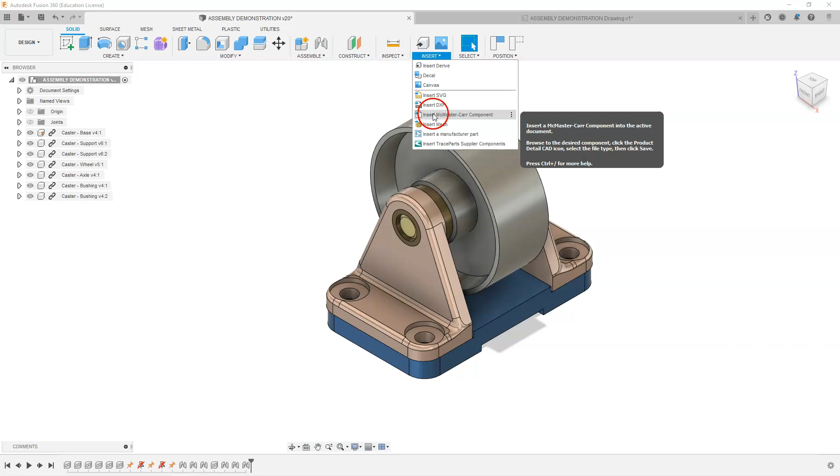So we're going to start off with our wheel assembly open in place. The first thing we're going to do is add some hardware, some socket head cap screws. We're going to go up to the insert menu, where we have some options to insert parts, and we're going to select Insert McMaster-Carr Component.

When we select that, the McMaster-Carr website is going to pop up, and we have many options. If you scroll down the left-hand side, you will see lots of hardware there. The first thing we're going to do is select screws and bolts.

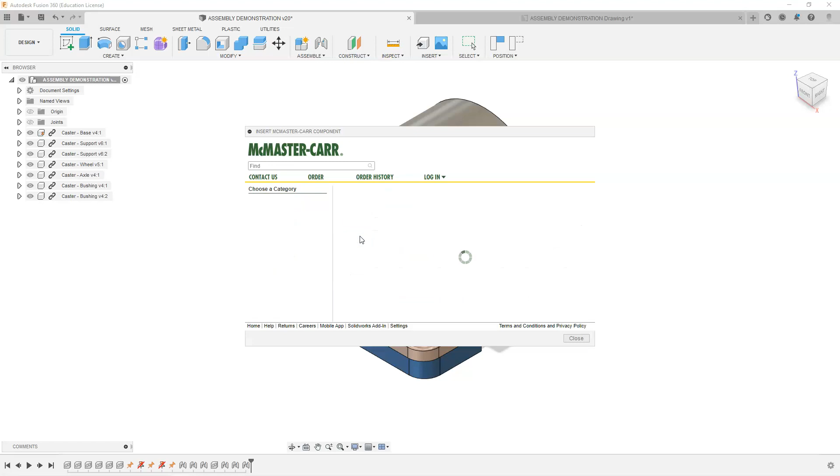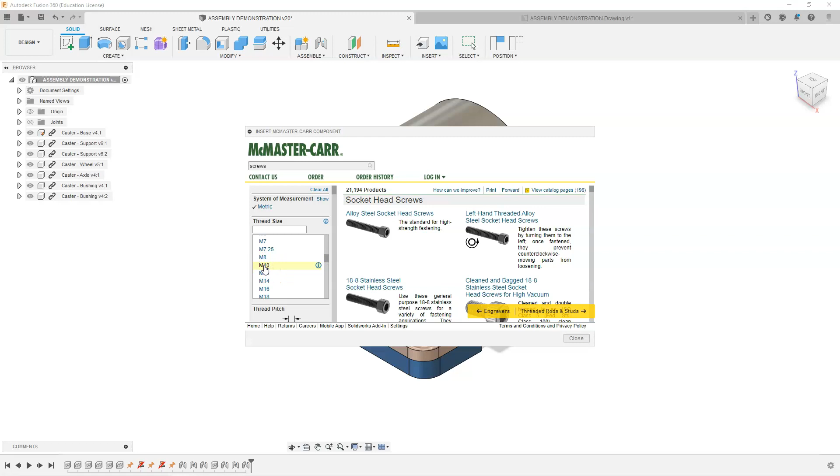We're going to start narrowing our selection down. We want a metric screw because our wheel assembly is a metric assembly. For our thread size, we're going to change it down to an M10. If we scroll through here and select our M10, that's going to narrow down some other options.

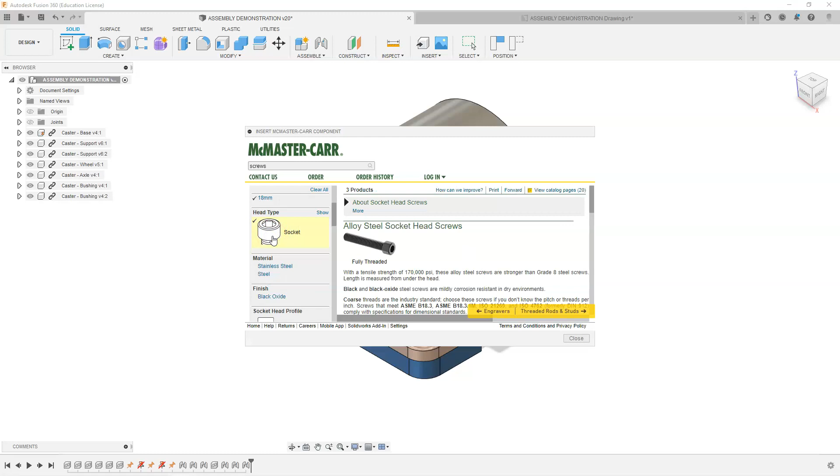So we can keep scrolling down here, and what we want is a length that's going to work for us. We're going to select an 18 millimeter, our head type is going to be socket head, and our material type we're going to select stainless steel.

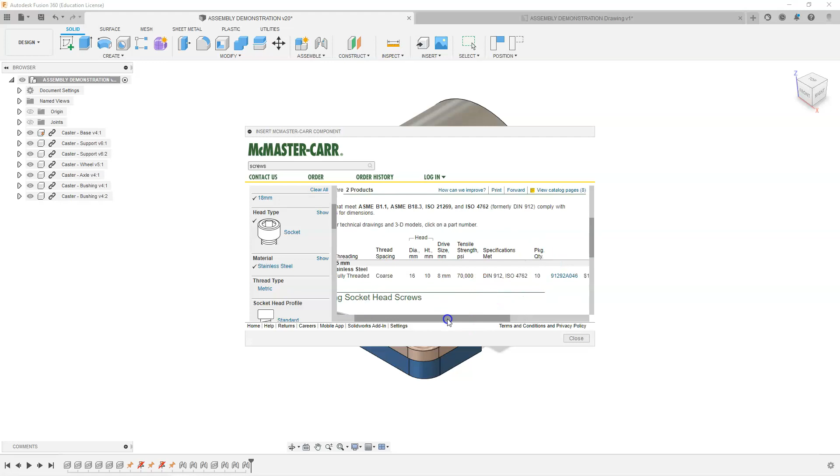That keeps narrowing our options down here, and it has given us some different options. We do have an 18/8 stainless and a sealing type socket head cap screw, but we're going to stick with this first option. If we scroll across and down a bit, we're going to select this product number here, so it's a link to that screw.

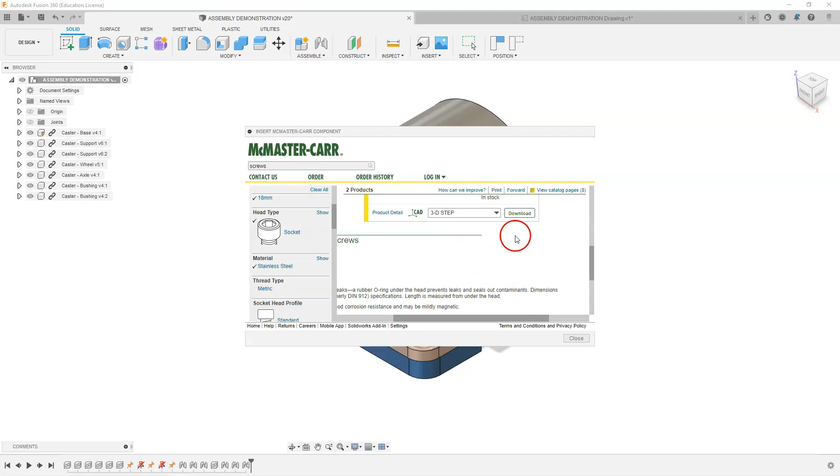What we can do is download the model. We're going to expand this and select the 3D STEP model, which is a standard type of 3D model, and then select the download button.

When we select the download button, Fusion will insert that screw into the assembly, just like we had any other assemblies. I'm going to rotate this a bit, get it in the orientation we want, and put it off to the side here. I think that is good for now, so we're going to select OK.

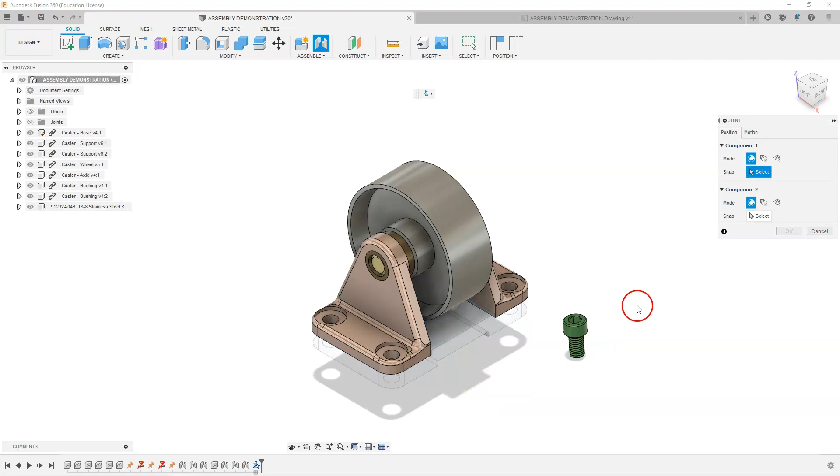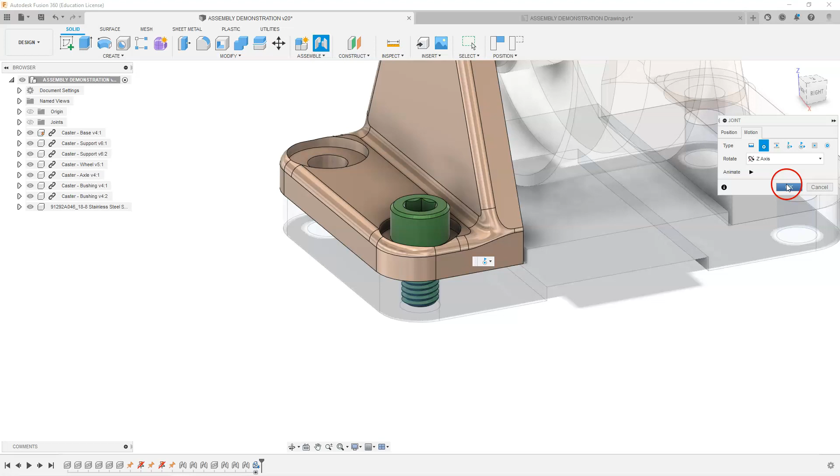So we have one screw in there, and we're going to have to put 4 in there. We're going to use our joint command, J shortcut key, and select the bottom edge here, matching it up with the bottom edge in this countersunk hole. We're going to make sure it's not rigid, so we'll use a revolute option, select OK, and go back to our default view. We can see that we have added that screw in there.

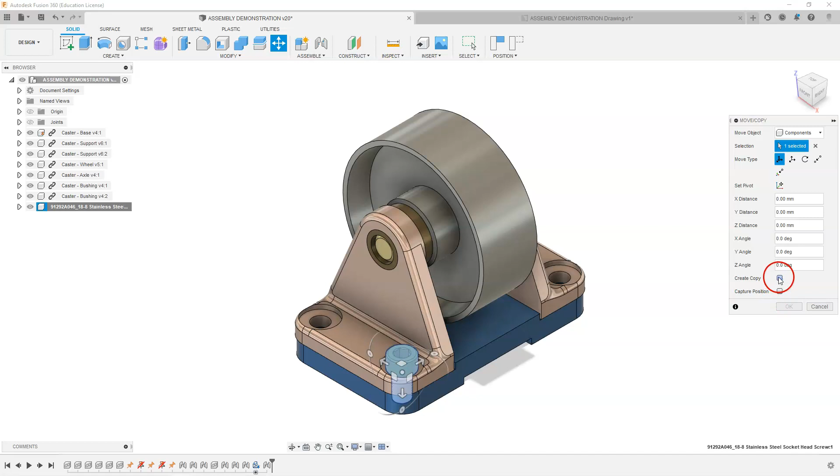Going back to our default view, I'm going to continue to add the remainder of these screws in place. I'm going to select that screw, then select move copy and make sure we select create copy, and just drag that over there and select OK. We can do the same thing again with this screw, selecting move copy again.

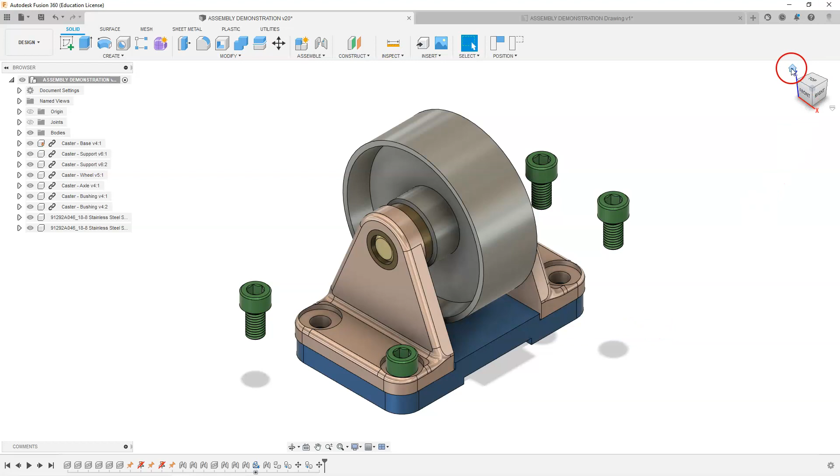Now we have all our 4 screws in there. I'm just going to constrain those all the exact same way that I constrained this first screw here. Now we have all our 4 screws in place.

The next thing we're going to do is create our exploded view. We're going to go up to our toolbar and select animation, and that's going to open up a new menu. As you can see, there are not too many options under there, so it's not as confusing or as difficult as you might think. We do have a storyboard down here.

Which we're going to control some of our motions. We can have multiple storyboards, so we could create multiple animations or explosions all in this storyboard or animation mode. We can also zoom in and out of our storyboard to get a closer look at our timeline.

So basically what we're going to do is start moving these components into an orientation or position that we would want to see in an exploded view, which is very helpful for creating installation instructions or installation videos. The first thing we want to do right now is turn this view off, so we're not going to include our different zoom levels in our explosion or animation right now. We can add that later.

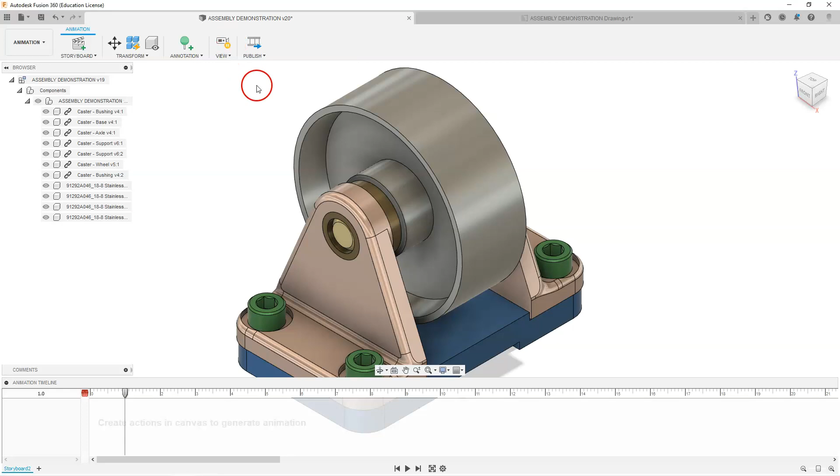So we can turn that off, so you will see the little pause button up there, and when we zoom in or zoom out, it's not going to add that to our animation.

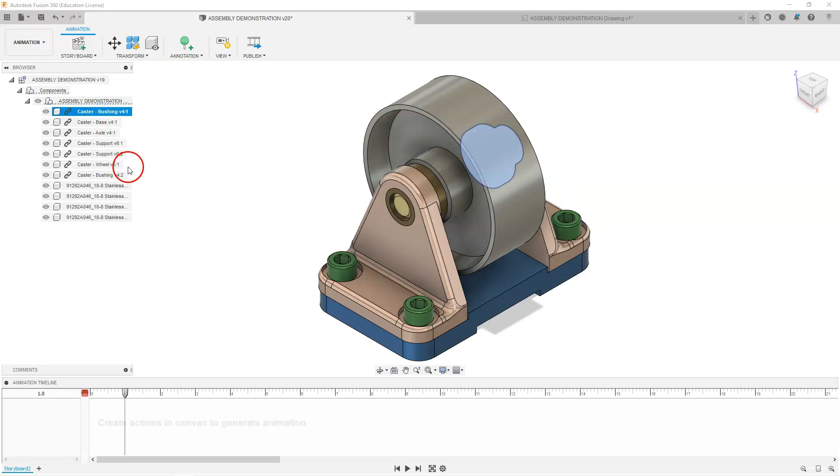So ideally what I want is I want all of these parts off of this base for starters. I want them all to be kind of in line. So what I'm going to do is hold the shift button down, or click shift, left click the first model, and shift click to select them all. And I don't want to touch my base, so I'm going to control click that, and you'll see all the other items have been highlighted.

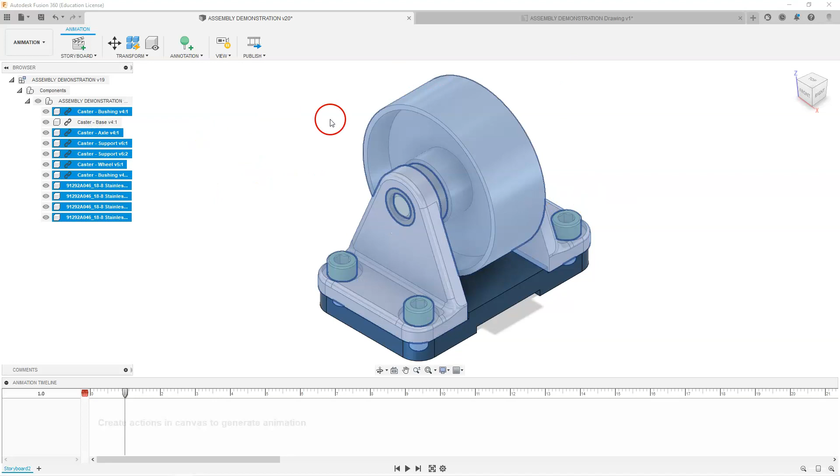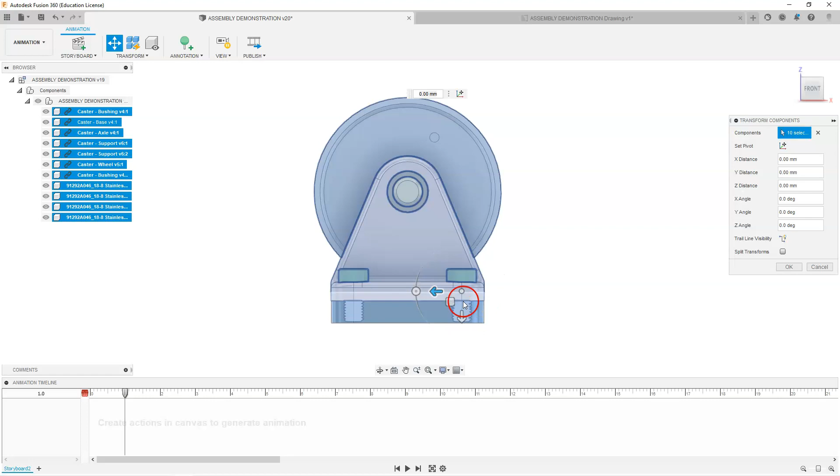Then I'm going to select my transform components, and you're going to see similar move dialogues or tools up here that you're familiar with. I want to move this straight up vertically. I may want to look at the front side of the view to see where I want that in relationship.

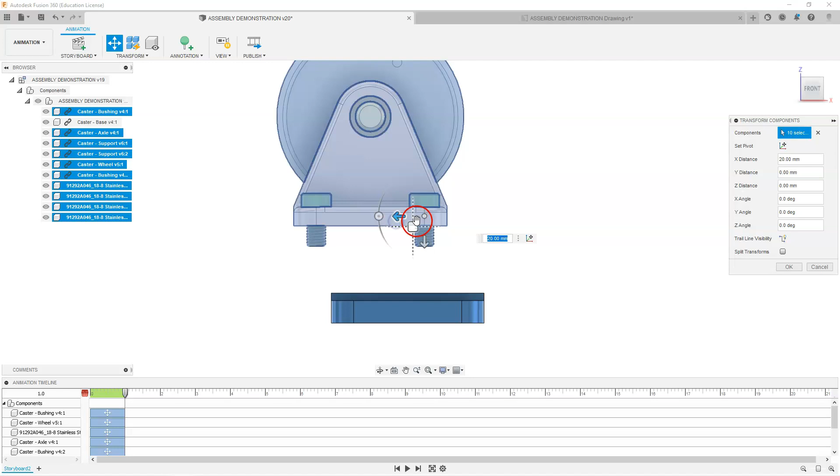So what I'm going to do is move that up to -40 millimeters, and I can control that in the dialog box, and I can add multiple moves on here. So I could go up 40 and left 20, but I'm going to keep that straight in line with the base plate for now.

Select OK, go back to my home position, and you can see that has been lifted off of the base plate. If I decided that I needed to move that or transform that further, I could right click on my object down in the timeline and select edit action, and I could make additional adjustments to that.

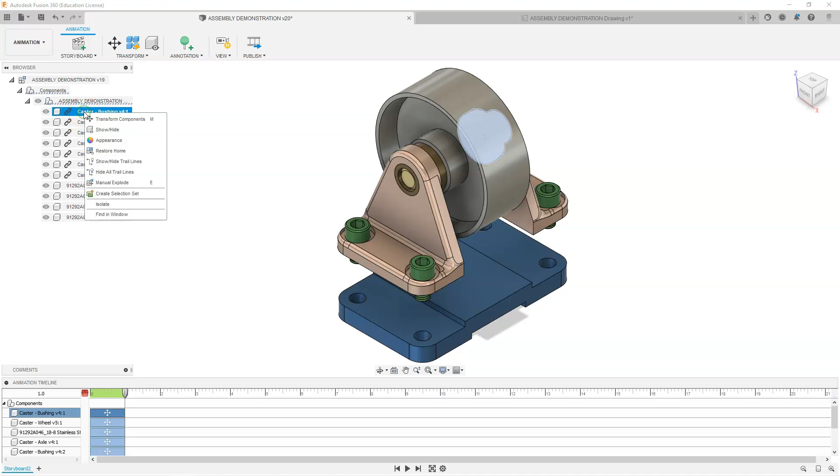The other option I have in here is trail line visibility. So what that does is add some dotted lines onto that transformation. We can also right click on there and select show hide trail lines.

We can't see the trail lines in this view right now because I'd only selected the caster bushing, which is on the far side. But we will see what those trail lines look like with further movements.

So now I'm going to make some additional adjustments to this. I'm going to move the support brackets, both of them. I will have to do those individually. So I'm going to move those horizontally out of the way, and as well I'm going to move those screws with them.

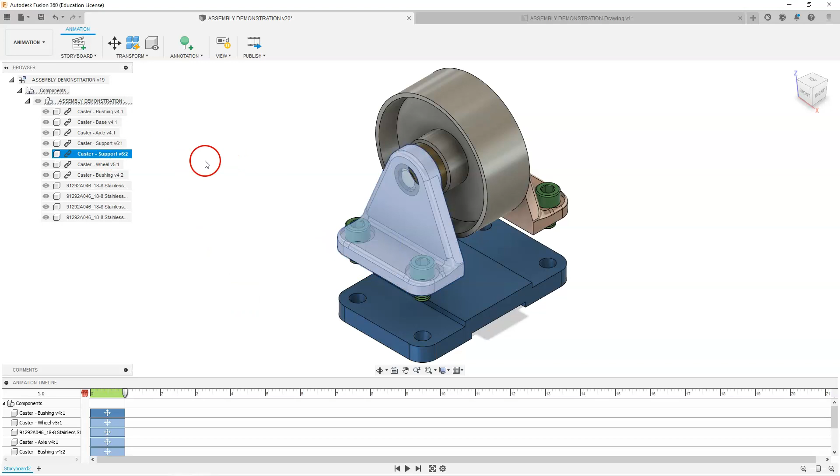So I will select my angle bracket and select transform, and I'm going to drag that out. I think 110 millimeters looks good. And if I selected the trail line visibility, you will see that trail line is showing my movement of that piece.

If I select split transform, that's going to show both movements, so it's going to show that this has been transformed up and transformed that way. I'm going to select OK. I'm satisfied with that one.

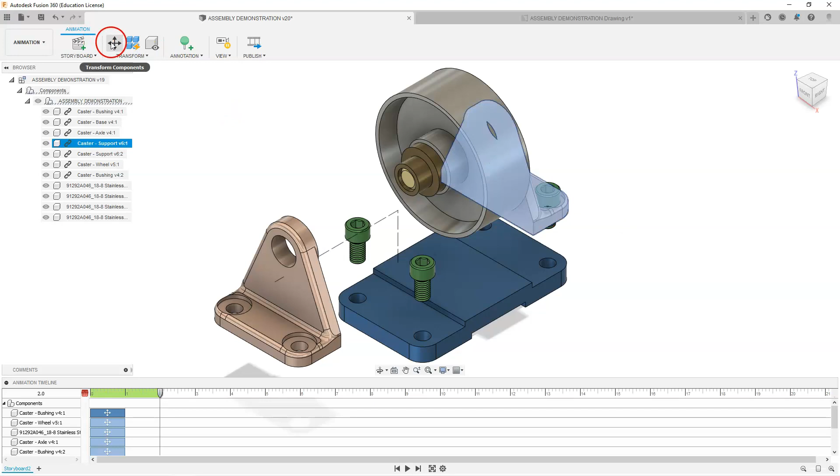Going to select my next component, which is going to be this angle bracket transform, and I'm going to move that one 100, same distance. I'll go 110 millimeters that way, and I can turn on my visibility there as well and select OK.

So you can see that my assembly is being broken apart into a more exploded view, and down in our timeline it is adding these motions down here. So that one was the last one I added, and that was the last one I added. So all of these in that first row, this is our timeline, these are all moving together from the time period of 0 to 1.

So the next transformation I'm going to do is the bushing. So I'm going to select my bushing and select my transform, and I'm going to drag that. I will drag that 50 millimeters, select OK, and I will do the other bushing, which is on the other side.

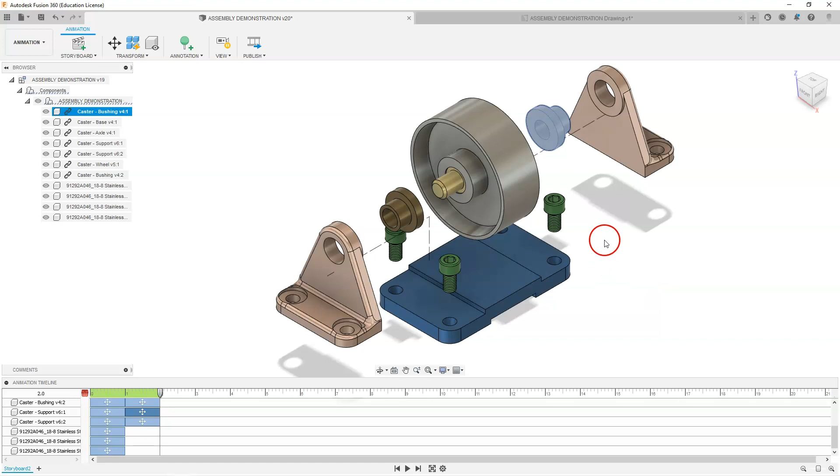And select my transform, and I'm going to move that the exact same distance, 50 millimeters that way. Select OK, and I'm going to transform my axle now. I will select the transform for that, and move that up, zoom out a bit so I can move that a little bit higher, and 100 millimeters.

That way it looks good. Now the last things that I want to transform are my screws. So if I want to see what this is going to look like in an animation now, I can select play, but we can make some of those modifications afterwards.

So what I'm going to do is select those 4 screws, and I'm going to do each one individually as opposed to selecting all 4. It might make it look a little more realistic when it comes to an animation, but we have to remember this is a view we're going to see in our exploded view drawing, so we want to make sure we capture everything.

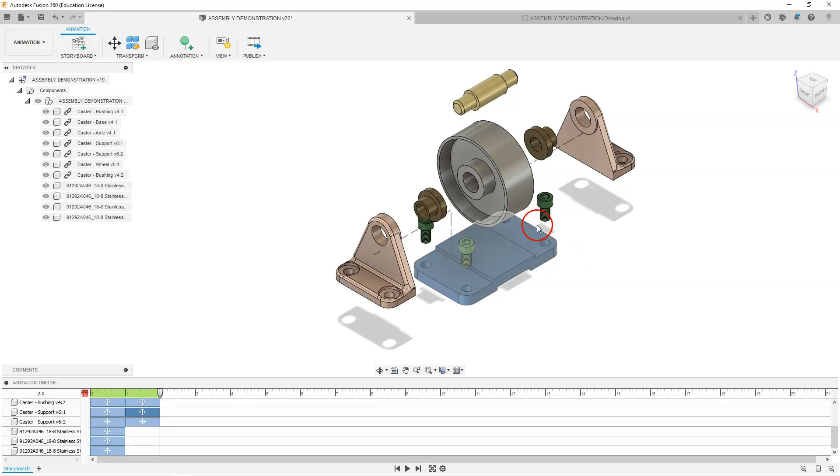So of concern right now is probably going to be my back bolt there, which I can't see. So I'm going to move that one first and see what that translation distance is so it's going to be visible. Selecting my corner bolt, select my transform, and I'm going to drag that up to there, and that was 90. Select OK, transform that. That is going to be 90. I'll do all 4 of those bolts, keeping the same distance.

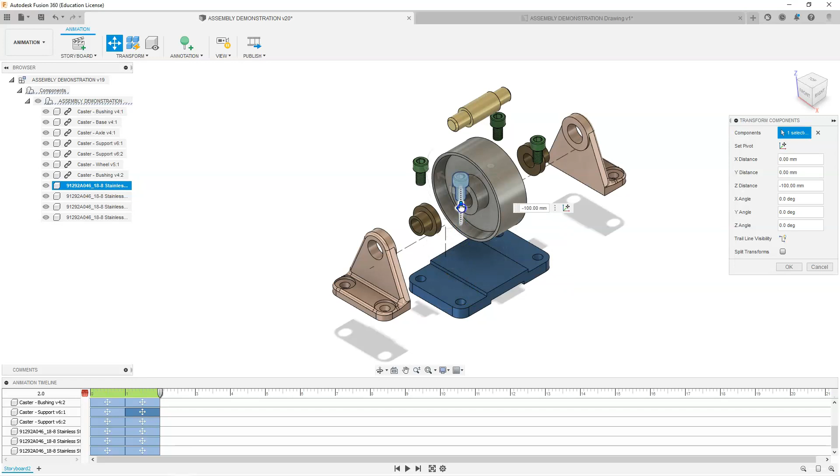So it is getting a little bit crowded in here. I might want to move my plate down, or I might want to move this one up a bit. So I'm going to go in and edit this transformation and shift that one just a little bit higher. I don't want to select that and drag that up, that's going to add an additional transformation. What I want to do is go edit that transformation.

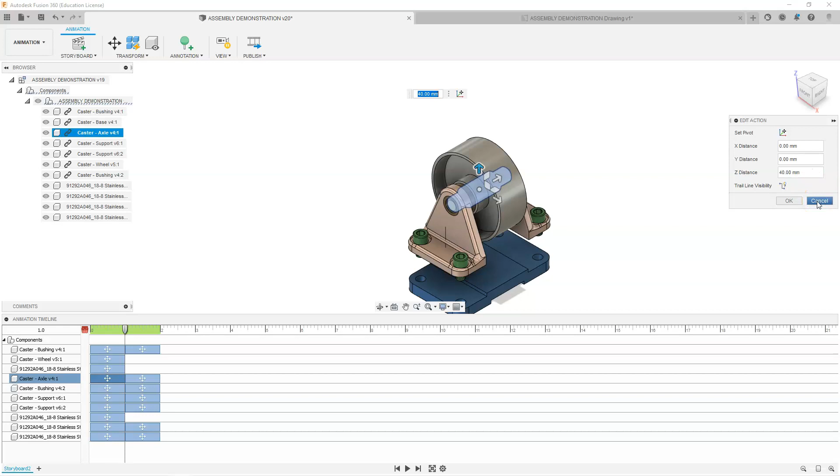So I'm going to select my cancel so that I'm not in my transform components anymore, and I'm going to look for my caster axle in my timeline, and I can drag this up a bit. Caster axle in my timeline, and it is this one that I want to edit there. So I want to edit this transformation here. I'm going to right click on that, select edit action, and drag that up just a bit so I can see all that information in there.

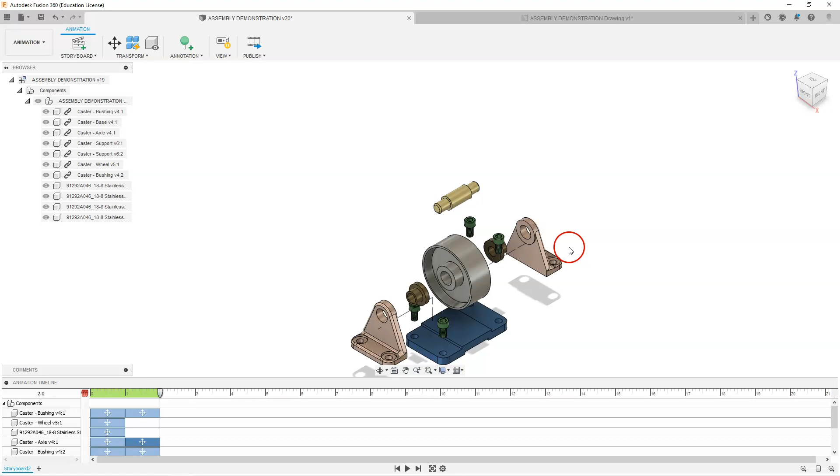Now back to my home, I'll drag this back down, and I'm going to look at the front view just to make sure I've got those screws. So I did not move some of those screws up, so I'm going to have to adjust these screws. Not sure what happened to those screws.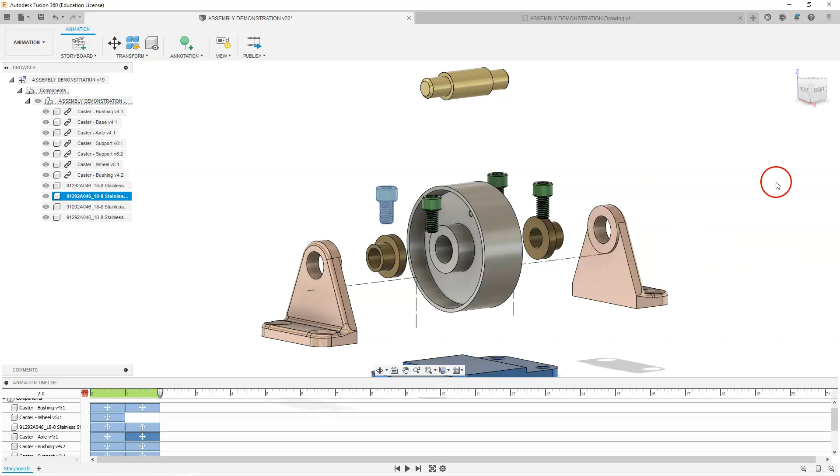They were up 90, 90, and verify that those are all in line. So I can see the front view or right side view of my exploded component there. And if I was to create my assembly, this looks fairly good. I may want to bring these screws, do some additional transformations to bring them out in the X plane. And what we're going to do is use this image to create an exploded view drawing.

So now we have to go open up our previously created assembly or wheel drawing that we've already created, and I'm not going to create a brand new drawing in this drawing here. I'm going to add a second sheet. So it has been updated. You can see this description here has been updated, so we're probably going to want to go back and take some of that information out of there. We should maintain that down to one line. But for now, we see sheet 1 of 1.

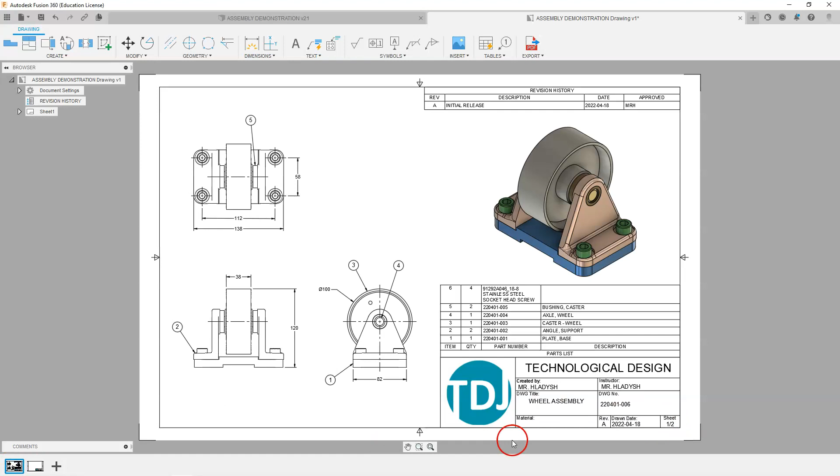But if I go down to the bottom here and select Quick Add, that is going to add an additional sheet. So that has been updated to sheet 2 of 2. And if we go back to the first sheet, we will see that says sheet 1 of 2. So working on sheet 2 of 2, we are going to add our base view in here. So we're going to select base view, and in the drawing view dialog box, instead of selecting our model representation, we're going to select our storyboard representation that we have.

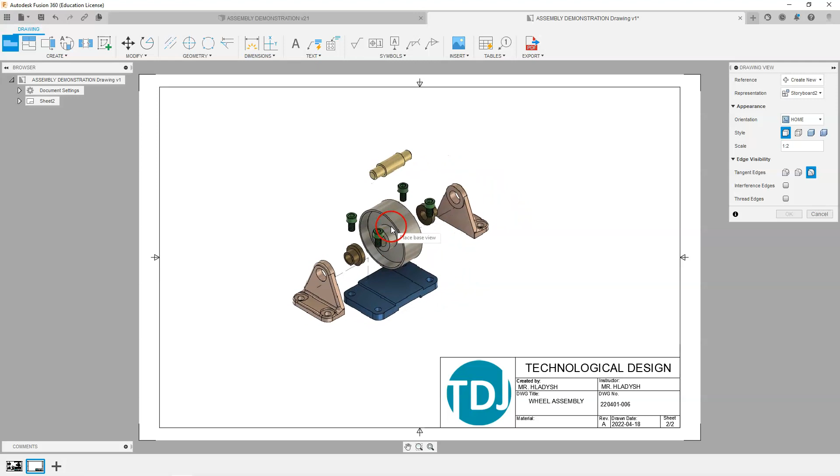So when I drag that in, that looks like a pretty good scale. I'm going to change that to a 3/4 scale. Looks like we have a little bit of room in there, might be able to make that a little bit bigger. Everything else looks fine. We can keep that as a non-shaded view, or we could change that to a shaded view. Typically for assembly drawings, maybe if it was a marketing drawing, you may want to keep that as a shaded view.

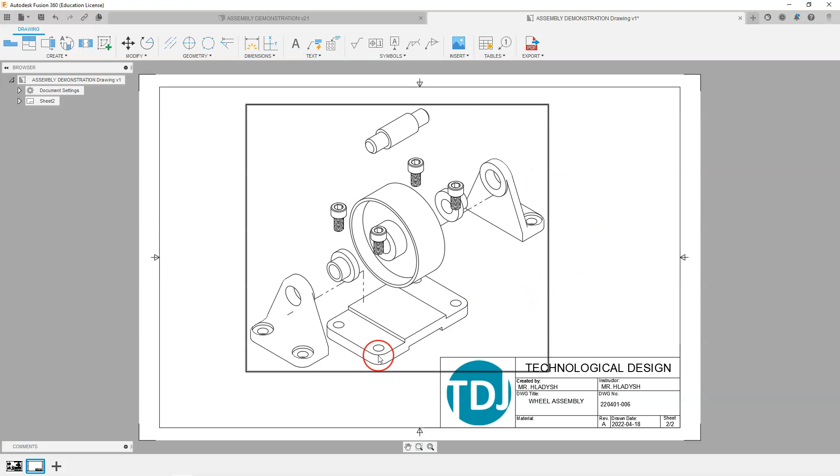And so now we have our assembly drawing that is in an exploded view. So I'm just going to save that now before I go any further.

We can't add all our balloons onto this yet, but we would have to add our table onto this. So we're going to select table, and automatic parts list would probably work.

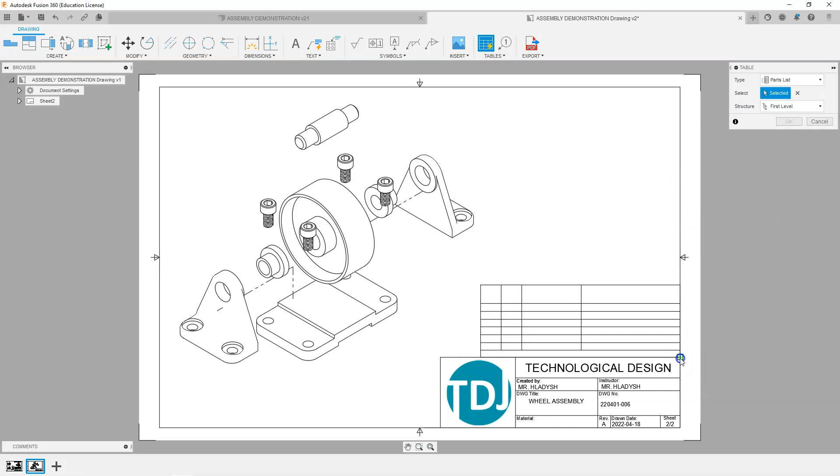Let's make some adjustments on here for the size of this table. I'm going to select that table, move it over here. Hope that didn't drag the column. Just want to move that whole table close to there, and we're going to drag that description out.

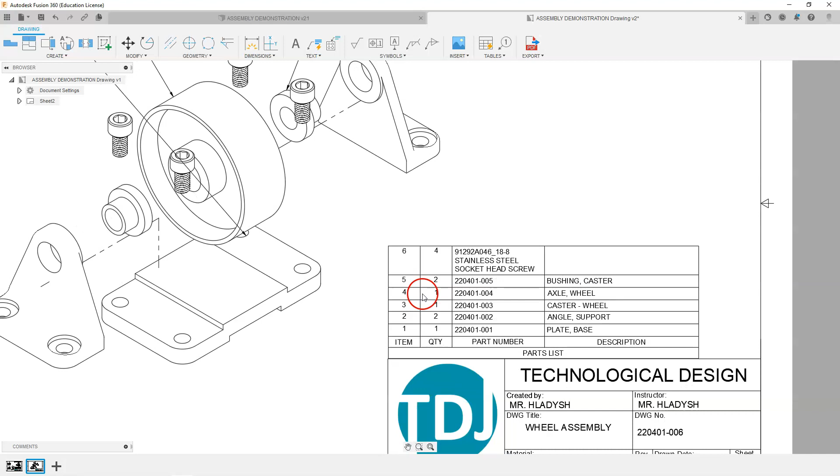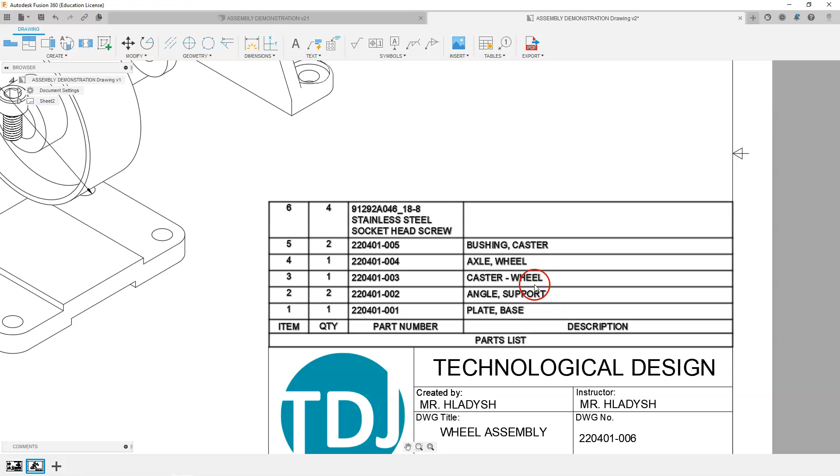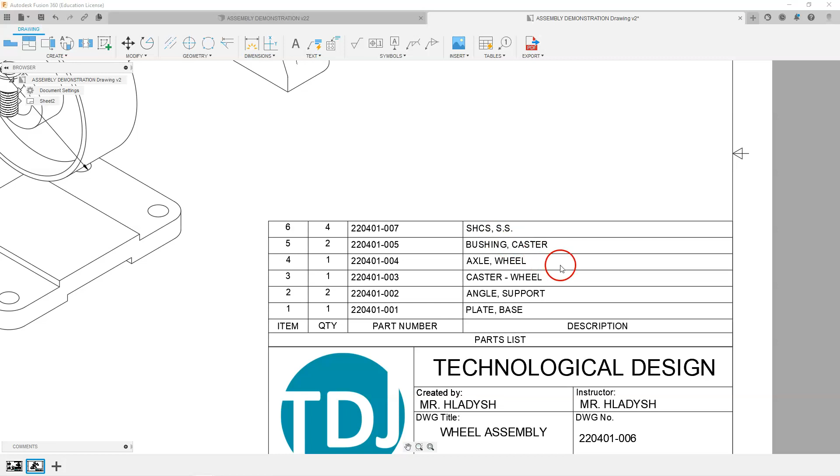Once again, we're going to move that table so it snaps down to the bottom right-hand corner there. We want to go through and open up one of those screws, and change that description so it says socket head cap screw, and change that number to -007. I quickly adjusted the part number and description, and it left a huge row height, so I actually deleted that table and resubmitted the parts list table again.

And it has, as you can see, added all those balloons in there. So just like we did in the previous assembly, we're just going to go through and modify some of these so it looks a little bit cleaner.

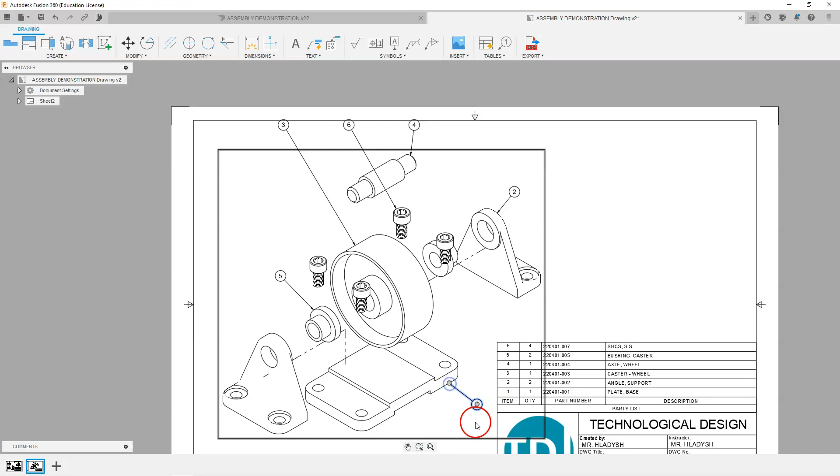We may want to change, for instance, this bushing - it's not really clear where that's pointing to. So I'm going to select that node and move it over to this bushing. It presents nicely if you keep your balloons on similar angles. So item 1 here, the base plate, obviously I don't want that pointing over there - somewhere down here would be more applicable. Trying to keep some of those angles roughly close, and the wheel looks fine.

I'll bring that balloon down, and the shaft, I think we're going to move that over here just to make that look a little bit neater. We don't like to have these leader lines crossing over objects - this leader line is crossing over that shaft, so we're going to change that and try and keep that leader line similar to this angle. We'll do the same with this shaft as well too.

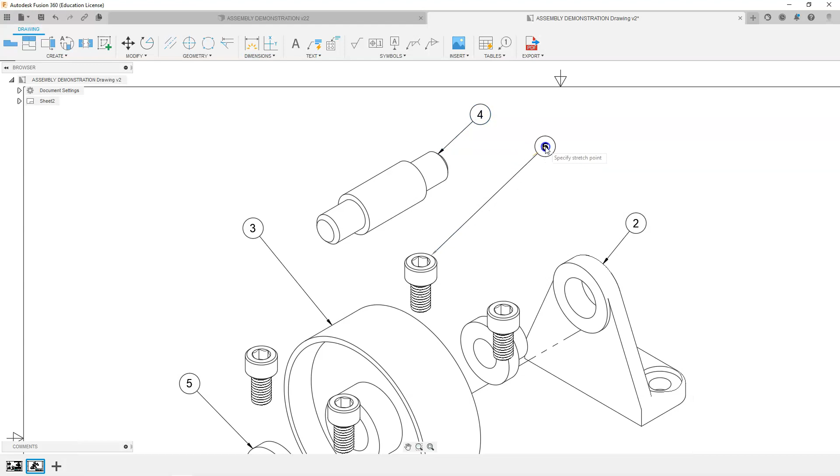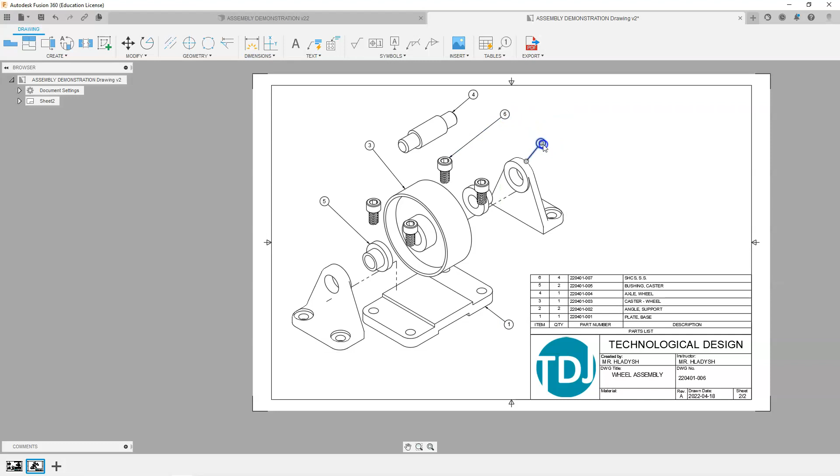It just makes things look a little bit neater when we can keep some of those lines parallel. It's not imperative, but it does provide a nicer effect. So we have all our leaders on here now. We might want to spread this one out a bit to keep our balloons outside from the objects, and I'll make some small adjustments on these to make sure they're looking nice. It's a little picky, but it looks nice for the viewer - makes it a nice, easier read. So we have all those balloons added on there.

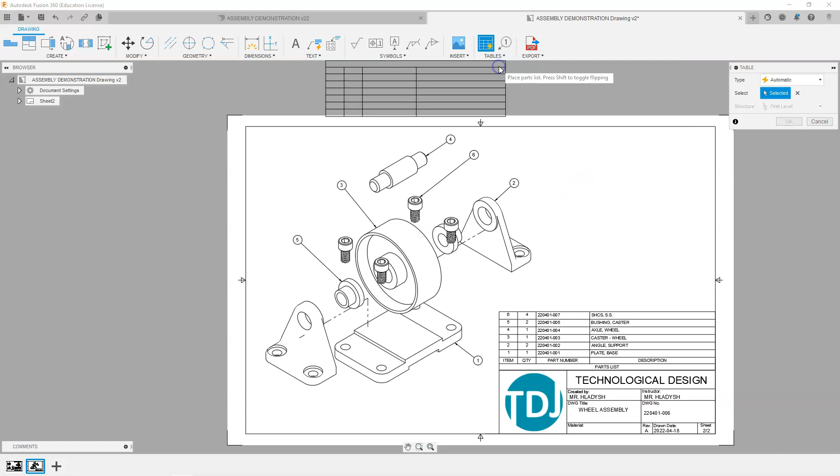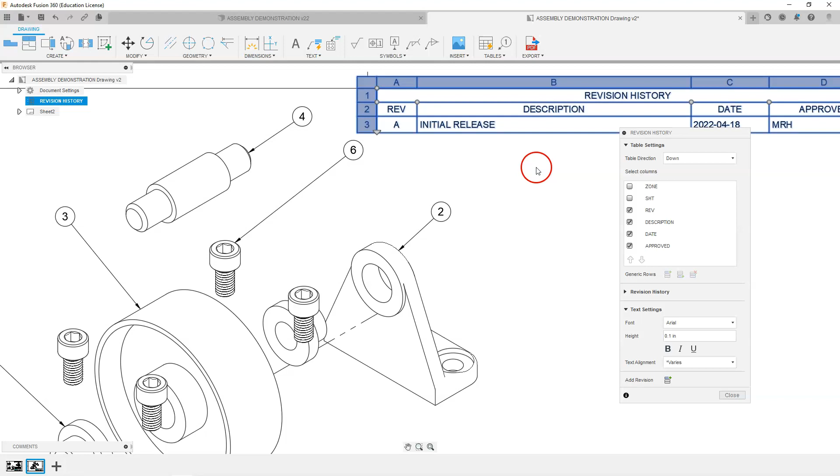The next table we're just going to add is our revision table again. So select our table, revision history, place that up there, and we can leave that information as is - it's the same as the first page. These will always be the same as the first page, or every page should be on a multi-sheet drawing. Every page should have the exact revision table on there, so everything looks fine.

Title block is all complete, same as the first page - that information is transferred over. We may want to show some tangent edges on there so we can see some of those radiuses, or if you like, you can make that into a shaded object as well. I'm going to leave it like that. Hit save, and now we are complete.

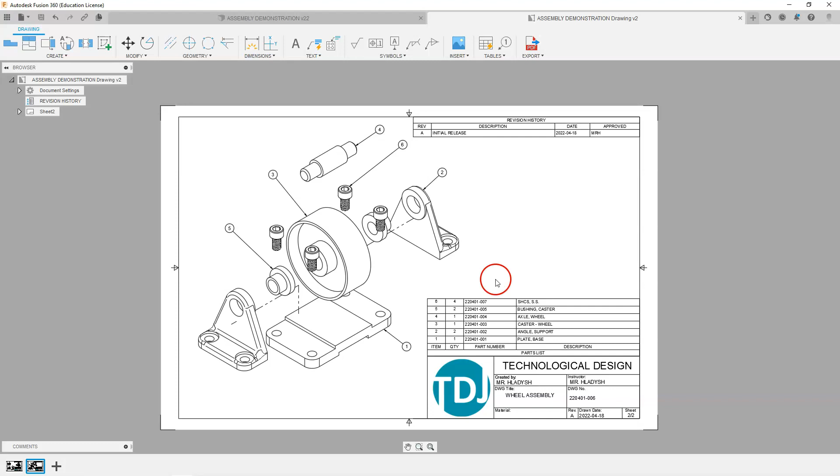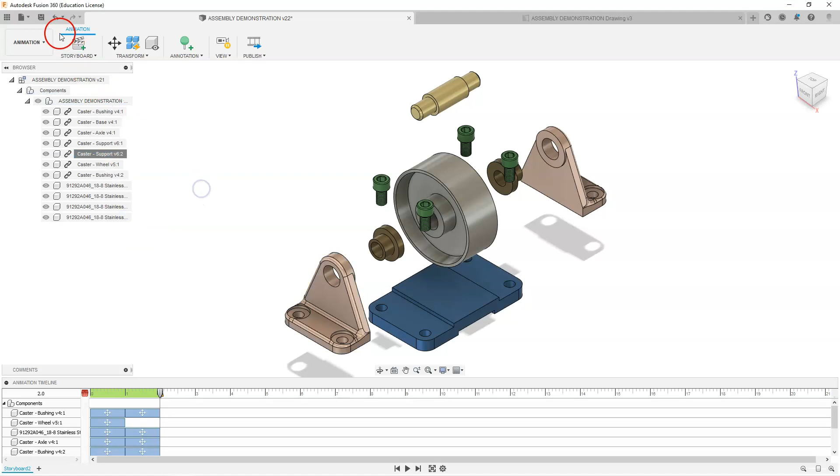We've completed our assembly, exploded assembly, and we can go back and remove these lines here. We went back to our model and back to our animation - this is for the caster support. We can hide all the trails, and for the other caster support, hide all the trails, and hit save.

Hopefully that should be updated in our assembly drawing. So open up that drawing, refresh it, and we should see those lines gone. So hit save, and we are done with our exploded view drawing.